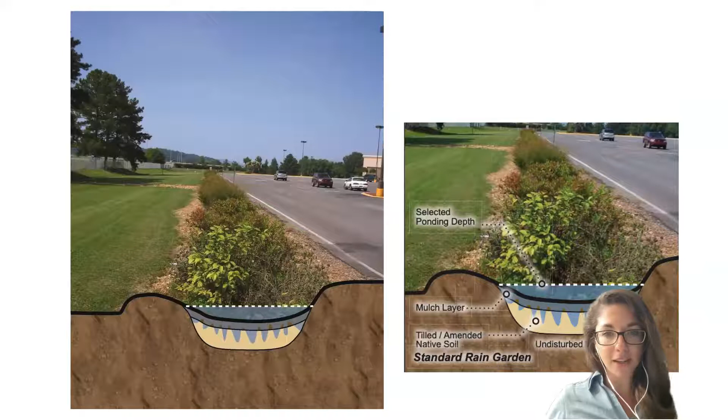This is just an example of your typical rain garden. It consists of a low depression in the landscape with native plants, mulch, and potentially amended soils—not too complicated, and definitely something you can do.

We'll go over this again, but as a reminder, rain gardens are designed to filter and help capture stormwater runoff. They're designed to hold some of that stormwater in a ponding area before it runs off to wherever it's going, whether that be the local storm drain or somewhere else. We will talk today about how to figure that out.

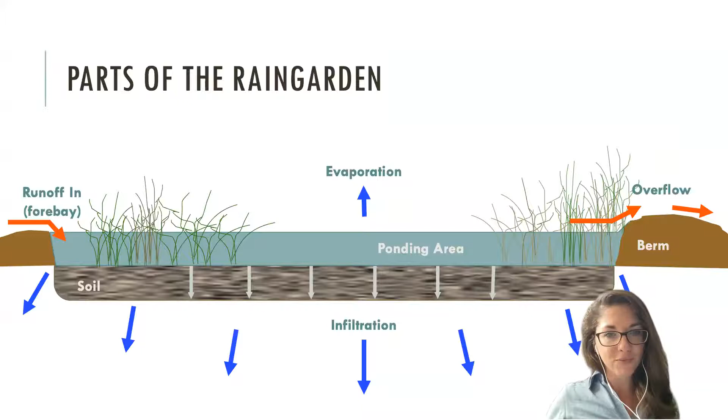We'll be going over quite a lot. Okay, let's see.

We went over this a little bit yesterday, but the benefits of establishing a rain garden: not only are you helping make a difference in improving stormwater and cleaning your local streams, but this is also something that you can do fairly low cost, with the added benefit of using native plants to increase habitat.

It doesn't have to be too costly, and there are ways you can make this a really attractive landscape feature for your yard.

So this is kind of where we left off yesterday. We'd already gone through the site analysis and at this point selected where we want to install our rain garden. We've already called 811 and made sure there are no utilities, and we've addressed all our constraints, so we have a location that we think is going to be workable.

I know these first couple slides are review, but we talked about paying attention to the topography of the landscape—where does that rainwater move when it falls onto those impervious surfaces? I showed you this site yesterday where we were going to install a rain garden, and I outlined this portion of the rooftop that we knew was going to be collecting stormwater and directing it to our potential rain garden site.

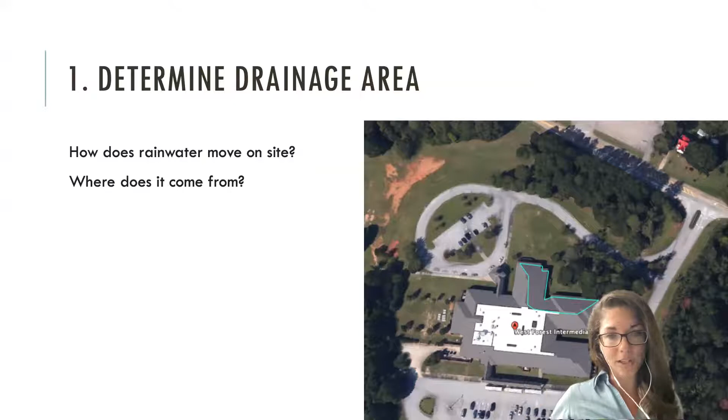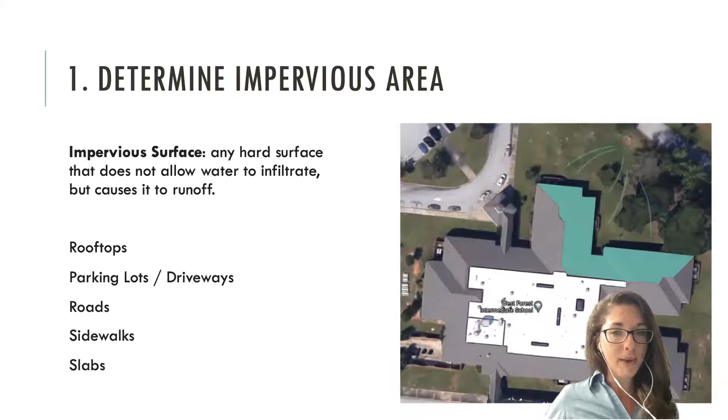We talked about impervious surfaces, including rooftops, driveways, sidewalks—anywhere that stormwater is going to flow and not be able to infiltrate into the ground. Anywhere that stormwater is falling from and may be redirected to your rain garden site is what we want to start calculating and keep in mind, because the size of our rain garden is going to depend upon the amount of impervious surface from which we're collecting that stormwater.

Again, it's review, but if you're trying to estimate the square footage, the area of those impervious surfaces, Google Earth is a really easy way to do that. You can find your site pretty easily online, then physically draw out the outline of the shape that's going to be redirecting stormwater to your site, and it will automatically calculate the square footage for you. Really helpful, especially for a large building.

But you can also pace it out on the ground—estimate your own foot pace and take steps along the side of the building to count it out that way. And again, always go visit your site. I highly suggest you do that, even though you can use these online tools to help map it out.

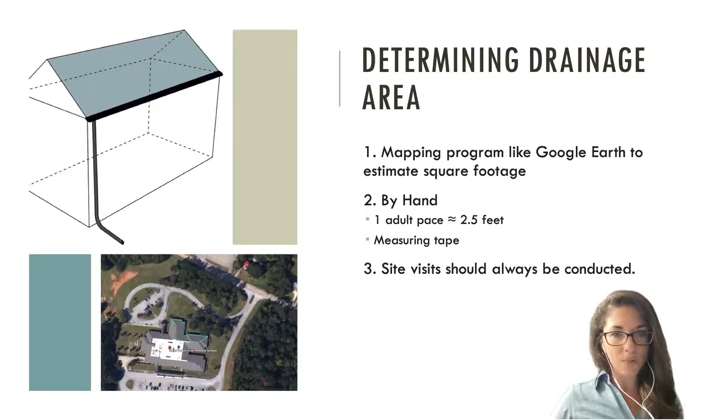This is going to be in the resources we give you at the end of the workshop, but it's helpful to tally all those square footage areas up so you have an idea of your total impervious drainage area. That's what we need to help calculate the size and depth of our rain garden.

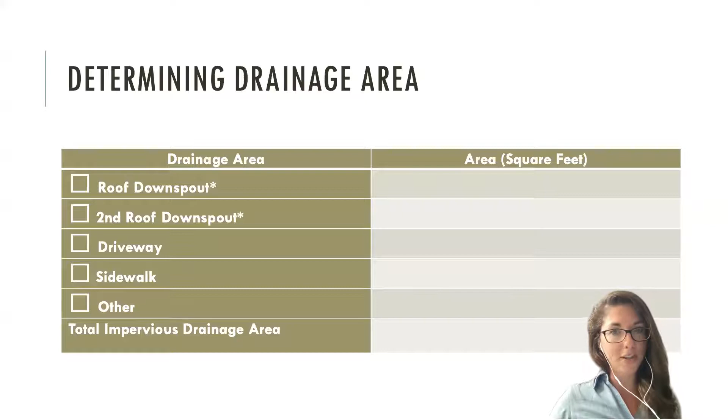I think all of that is pretty clear—I know that was a bit of a review, but hopefully everybody's on board now with the difference between a rain garden and your standard aesthetic garden, and why we're interested in calculating the size of a rain garden in relation to how much stormwater runoff we're going to be getting. Today we'll also talk about plant selection and how important that is in treating that stormwater runoff.

All right, so we talked about this yesterday, but here's just a refresher. Sometimes it helps to see this in a different way. So components of a rain garden that we're going to be talking about today.

So there's that slope, kind of where that water, the stormwater is coming in from. It pitches a little downward. You don't want to add a really steep grade. We suggest like a 3 to 1 grade to prevent erosion, especially if you're having a lot of stormwater runoff coming into your rain garden.

There's also the inlet. That's where that stormwater is going to be entering the garden itself. And you could have one or you can have multiple. We'll talk about it more and I'll show you some examples of what that looks like.

There's also a little buffer edge, before you reach all your native plants. And sometimes that might just be a grassy area, or a little bit of - some people even use rocks. So we'll talk about that too.

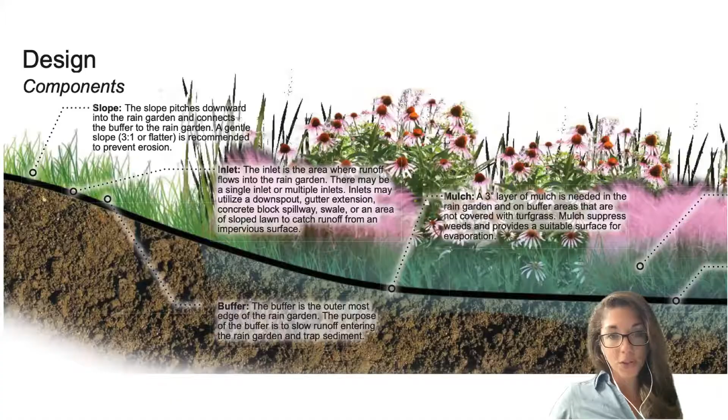And then we talked about ponding. That's that kind of stormwater storage area where we want our stormwater to sit for a little while, infiltrate back into the ground, and just kind of replicate that natural hydrology that we talked about yesterday.

And then the base of the rain garden, that's how we'll be estimating how deep we need to go and what that ponding depth should be. Generally, that's going to be a flatter area that allows our first flush of stormwater to filter into the earth.

And then we have our berm, which is a higher area towards the outfall of the rain garden. So we have our stormwater coming in, and on the opposite side, we'd have our berm that kind of helps keep that water in place and helps it pond. We'll talk about that as well.

And then lastly, you have your overflow. That's a little divot in the berm that allows that stormwater to flow out into the landscape, basically allowing it to overflow in a safe, directed way.

Okay, so selecting ponding depth - that, as we talked about, is the depth at which water will pond before going through that outflow. We talked about how you can do a soil infiltration test, and you should definitely do that to make sure that your soils are going to be draining well.

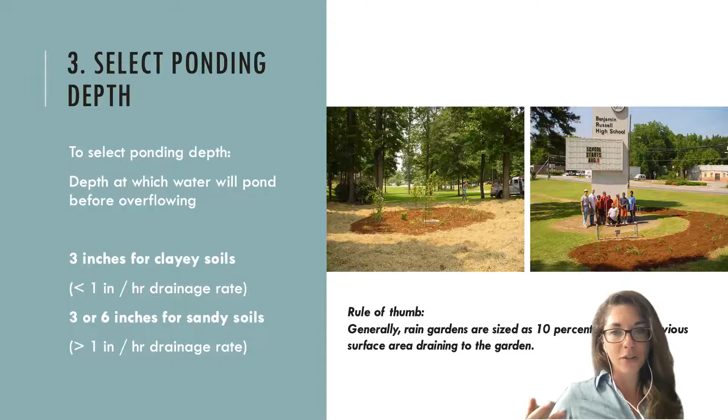A simple rule of thumb is that rain gardens are often sized to be about 10% - I know my head's in the way here - of the impervious surface area draining to that rain garden. That's just a helpful rule of thumb to have in the back of your head. Because when we're doing these rain garden calculations, it can seem a little intimidating at first, but really they don't have to be exactly precise. I think as long as you're kind of in the ballpark and reaching that general range, that's okay.

So another helpful rule of thumb based off of that idea, that 10% we're trying to aim for of that impervious surface area for our rain garden size, is this 10-20 method. And this is pretty helpful and simple. So for a 3-inch ponding depth, we take our rain garden size, and we know that that equals basically our impervious surface area, our square footage that we determined, divided by 10.

If we want to do a 6-inch ponding depth, we just divide that impervious area by 20. Here's an example, and we'll walk through multiple examples with you so that you will totally have it by the end of this workshop. If we knew that the building we were capturing impervious surface from was maybe 30 feet by 12 feet, we multiply that to get the area.

If we know our soils are not draining at a really high rate, we might want to select a 3-inch ponding depth. To do that, we just divide the surface area by 10, and we can estimate we'd have about a 36 square foot rain garden. The 10-20 method is really just a helpful rule of thumb to estimate your rain garden size based on infiltration and the area you're trying to treat.

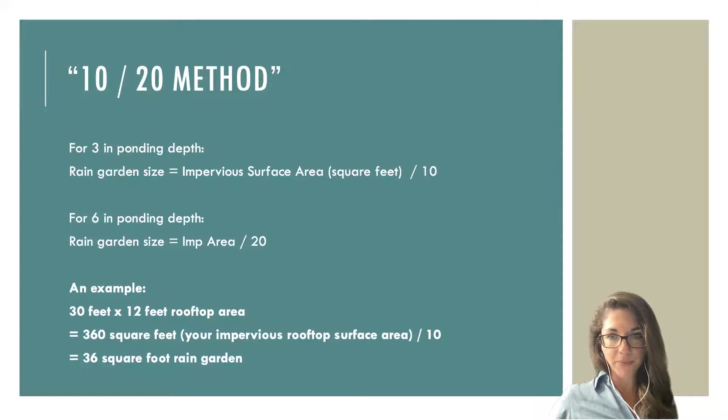I saw someone had a question about how critical the size is in a home garden - is it okay for it to be larger or smaller? Yes, I think this is kind of what Rachel asked yesterday.

We're trying to estimate these sizes to treat that first flush based on the amount of stormwater we expect to get to our rain garden, but we have constraints - we can't always do that. So you can have it be larger or smaller, and if you've designed it well to have that overflow, that should be okay. It'll just mean you won't be able to treat necessarily all of that square footage you'd like to, but you can still capture a good deal of it. We can talk more in depth about that later on too, Beth, if you want.

When we talk about ponding depth, we're also thinking about excavation depth. When we go to install our rain garden, how deep does it need to be to get that ponding depth? This is a little tricky - if we're aiming for a 3-inch ponding depth, we actually need to dig down more than 3 inches, especially if we're adding a mulch layer or amending some of our topsoil.

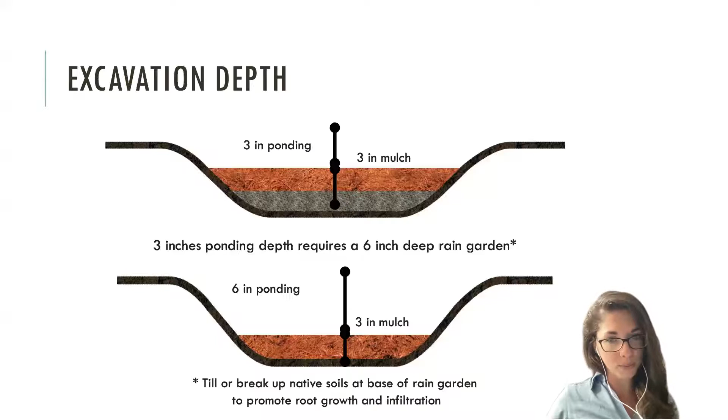Typically we suggest at least 3 inches of mulch on top, and you might want to dig down even a bit more to amend soils or put topsoil back in. So ultimately, if you want a 6-inch ponding depth, you might have to dig down 9 inches and then add back that mulch to make up those 3 inches. At the end, the depth between the bottom of your rain garden and the top overflow area should measure out to your desired ponding depth - just something to keep in mind for installation.

Going back to our earlier example of the building I was telling you about where we were going to install a rain garden - I used Google Earth to calculate their square footage, and we were going to be capturing a decent amount of square footage. We had done an infiltration test and knew the soils were pretty good in terms of drainage, so we decided we could opt for a 6-inch ponding depth.

To get that ratio, we took the square footage in area and divided it by 20, estimating our ideal rain garden size might be about 394 square feet. So then how do we determine the actual length by width we want our rain garden to be? One easy way is to just take the square root - when we did that, we got an estimate of about 20 by 20. But you don't have to stick with only those dimensions; you can rework them to fit the constraints that you have.

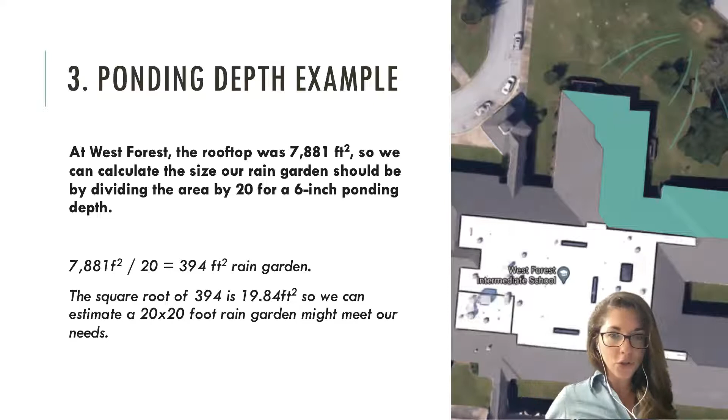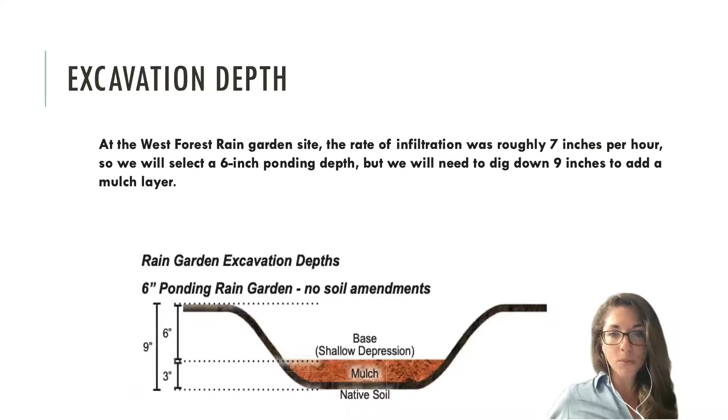So, you know, I told you we had pretty good drainage. We were getting about 7 inches per hour. So we did select that 6-inch ponding depth, and we were planning on digging down at least 9 inches, or maybe even 10 if we had some topsoil to put back in, plus adding that extra little layer of mulch. But ultimately, we would end up with a 6-inch ponding depth.

Okay, this is a bit of a review of some stuff we've already said. Keep in mind that when you're excavating to that ponding depth, you also need to be factoring in mulch and soil amendments. We want to be aiming for, like in that example, a kind of flat bottom to your rain garden, but a slight center depression is okay. We don't want to have all the water only in one very low spot; we want it distributed.

So as we're excavating, we also want to keep in mind that we should stockpile some of that soil and grass that we're removing from the site. We're going to save that aside for a berm, and hopefully reapply some of the topsoil we've removed—that's like the first 4 inches or so. That's typically really good, rich soil that we might want to put back into our rain gardens, because it's often some of the best soil, but it depends on your site.

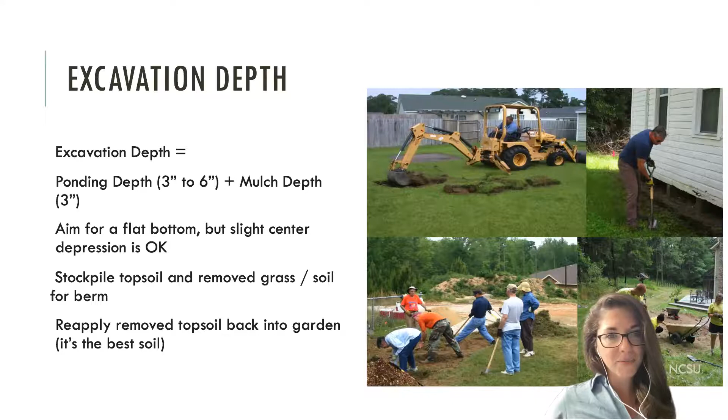Okay, so we talked about amended soils. Again, you can do a soil test, especially after you've done your rain garden, to make sure the soils are appropriate for plants. You could also do a soil test to see what the composition of your soils is. If you don't have time to do that, there's also the option to add in other types of amendment, like compost.

If your soils are not draining well, some people add in sand, but I'll make a slight caveat: do not use sandbox sand. You want to use coarse sand for any sand amendment, because there is a difference—round sand can actually clump and not help soils drain as well, but coarse sand will help with drainage. It really depends on the composition of your soil, but you can have a mixture of sand, that rich topsoil, and compost, if you're putting some back in to help new plants get established.

More details are going to be in the resources we give you at the end of this workshop, so if you want to dig into that more in depth, there will be more details there as well. Okay, so let's get into an example together—we'll do one together, and then we'll break out into groups and do our own example as well.

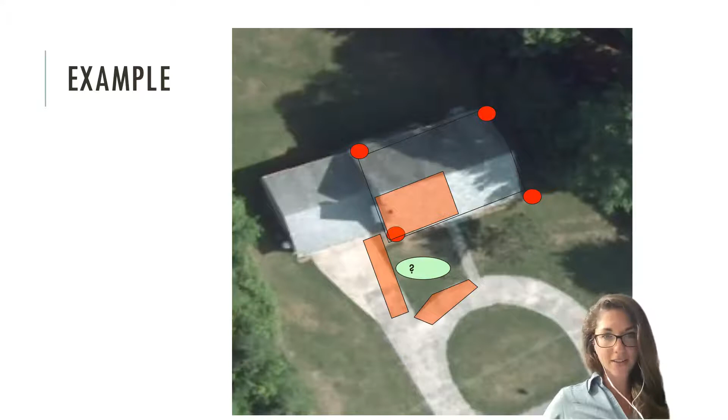Okay, so this is an aerial view of a house, and we're thinking about installing a rain garden here. The little red dots symbolize our downspouts. We did our site analysis and identified where those downspouts were. The areas that are highlighted are the impervious surfaces that we know are going to be draining to our potential rain garden site, outlined there in green.

For our hypothetical situation, we've estimated we have about a 50 by 50 foot rooftop total—that square area outlined. We also know we have about 400 square feet of driveway that will drain to the rain garden. We've done our infiltration test, and we know we have pretty good drainage—over 1 inch per hour. We're going to walk through how to determine what size the rain garden should be.

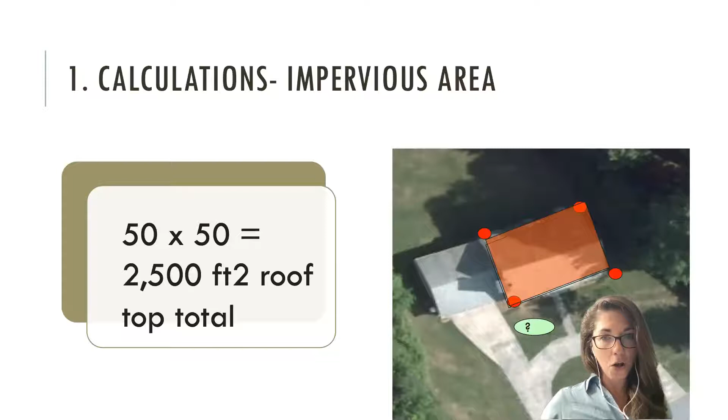First, we want to calculate all of those impervious surfaces we talked about, starting with the roof. If we have a 50 by 50 foot roof, we multiply that to get the square footage, and 2,500 square feet is our estimated rooftop total. But that's the whole roof—so what do we do if not all of the roof drains to our particular site?

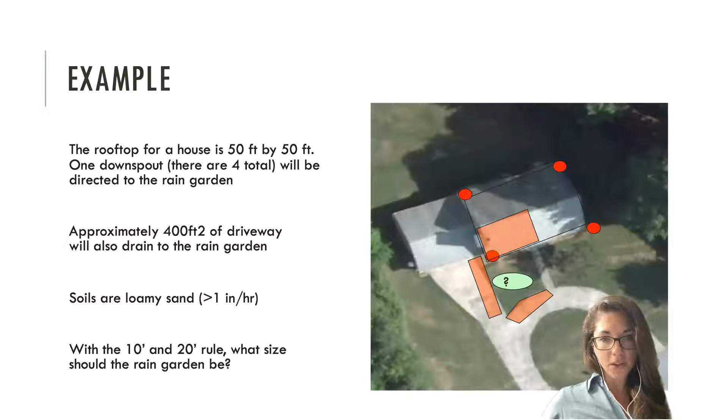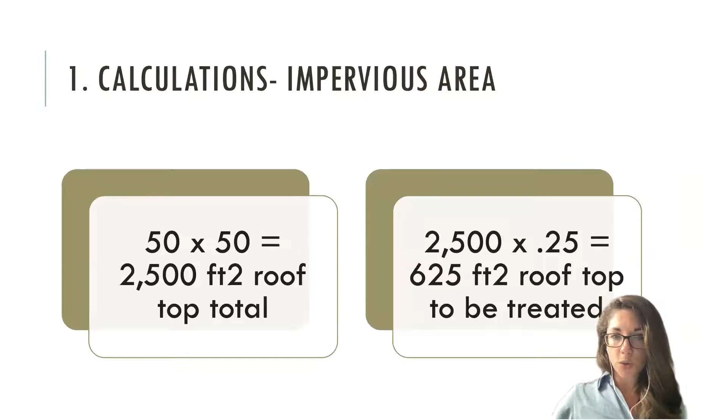There's an easy way to handle that: you can estimate what percentage of that rooftop is going to drain to the site. Going back to this image, we know this is about the area of the rooftop that's going to be draining, and that looks like about a quarter. So we multiply our square footage by whatever percent of the rooftop we think is draining to the site—in our case, about a quarter—which gives us 625 square feet of rooftop to be treated in our rain garden.

Okay, everybody with me there so far? Okay, so we got that.

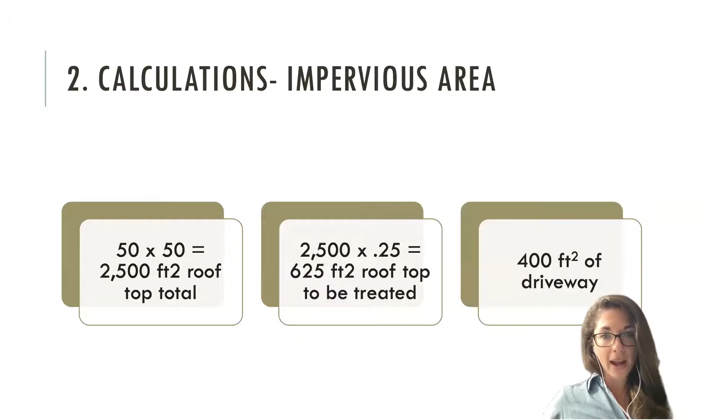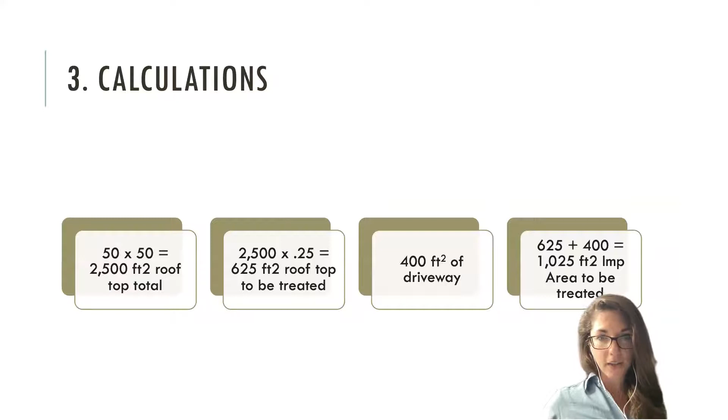We also know that we have the driveway that's also going to be flowing into our rain garden, right? So we want to make sure that we add that in. We've outlined that area that's going to be draining, and we know we need to add them all together. So we combine that, and we end up with over 1,000 square feet that our rain garden should be designed to treat.

Okay, so we've come up with that. We kind of know what our impervious surface square footage and area should be. What about our ponding depth?

We know that we have pretty good drainage, so we could opt for a 3-inch ponding depth. Sometimes this depends upon the size and your site constraints. If you needed to make that rain garden smaller, you could opt for a 6-inch ponding depth and hopefully still treat as much.

So if you were going to opt for 3 inches, we'd use our 10-20 rule. You could divide that by 10 to get that 3-inch ponding depth, and we'd come up with about a 100 square foot sized rain garden.

If we decide to opt for that 6-inch ponding depth, we're going to divide it by 20, and you can see it's going to be smaller, but deeper. So that could potentially help with our site size constraints if we needed it. That would be about 50 square feet.

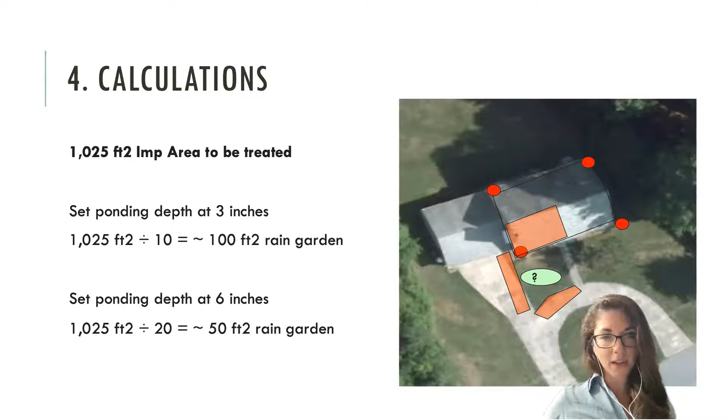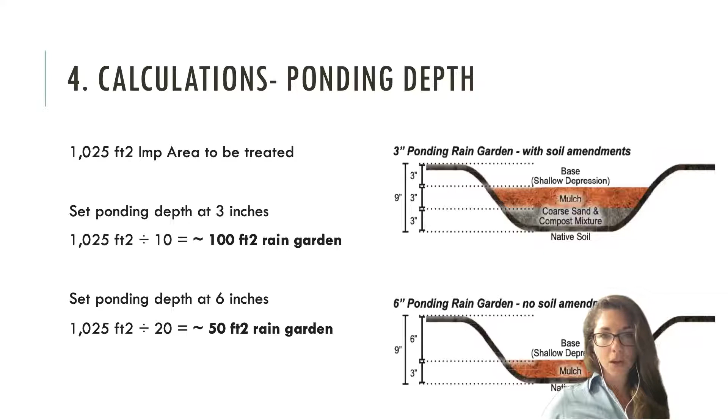Okay, and again, when we go to install our rain garden, we want to be thinking about how deep we'd actually need to be digging down, especially depending upon if we need to add in some compost or some coarse sand. We need to be factoring that into our excavation depth.

All right, so we are going to try this and see how it goes, but I'm going to challenge you guys. I'm going to put you all into breakout rooms. We've got almost 30 people here, so I'm going to break you up into small groups of about 5, and I'm going to give you a worksheet.

Caitlin, maybe you can help me get that link up. We're going to give you a worksheet you can download, and essentially it's just going to walk you through the same steps we just went through, except with some different dimensions. We'll give you about 5 to 10 minutes to work together in a group and come up with some rain garden sizes. Then we'll come back and discuss what you guys found and how that went.

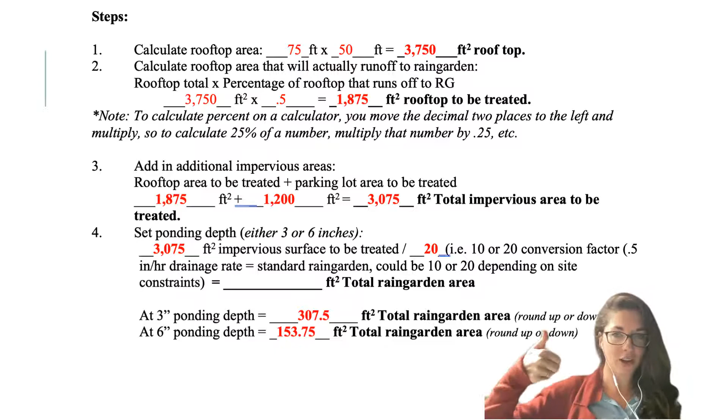Okay, so everybody on board? Looking good? Okay, good. So I think I'd mentioned earlier that rain gardens don't have to be exact, right? They don't have to be as precise.

So for the 3-inch ponding depth, we had 307. I rounded up, and some of you may have rounded down. So I ended up with this possible size of about 18 by 18. But again, we can rework those sizes depending on our site constraints. These would be some other potential sizes or dimensions that would probably treat about the same amount - 10 by 30, 15 by 20, all kind of aiming for that about 300 square feet.

And same thing with 6-inch. We went through the same process, and I came up with potentially about a 13 by 13 square foot rain garden. Did anyone get anything radically different than this?

Okay, I assume not. If not, we'll discuss in your Q&As and double check. But in the worksheets that you're going to get after the workshop, we'll include this. This might be a helpful way for you to walk through calculating your own site once you get to do your own site analysis. So we'll include the actual worksheet and the cheat sheet, just in case you want to double check.

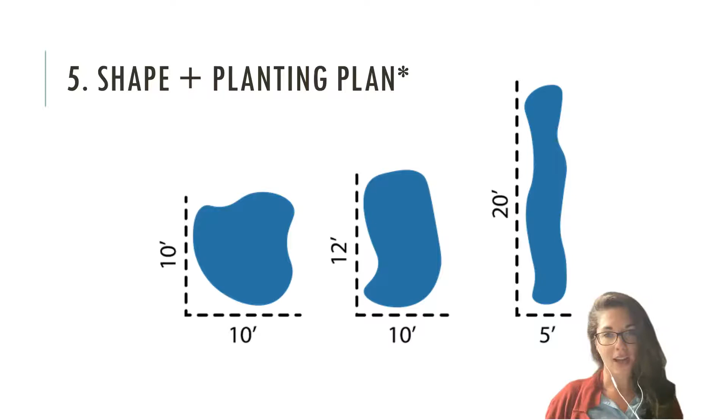You'll need something to break up the soil - shovels, backhoe, anything that's going to be helpful in loosening up those soils and helping you excavate. Some people use actual machinery, especially if they're doing a larger rain garden. That could be more difficult to come by. And again, you don't have to do that.

You can do it by hand. And it's a great way to get volunteers to come out and help you do some of this work as well, because doing it by yourself could be a challenge. But fortunately, there's always volunteer groups that you could reach out to and see if they'd be interested in learning with you. So wheelbarrows - definitely have some of those.

Stakes and string - we'll talk about why you might need that. Tarps can be helpful when you're removing that soil in the initial digging down to that ponding depth. It can be helpful to just have a tarp to put that on if you need to move it around, or you don't want to deal with trying to move it or shovel it up later.

Again, you don't have to have this with you necessarily, but you can think about soil testing to make sure that you have the right amendments needed for your rain garden. And then having a ruler or something to help you measure that ponding depth. And then thinking ahead, spray paint potentially if you are doing a large rain garden and you have a nice rain garden plan that you really want to stick to - that could be helpful when you're working with a lot of volunteers.

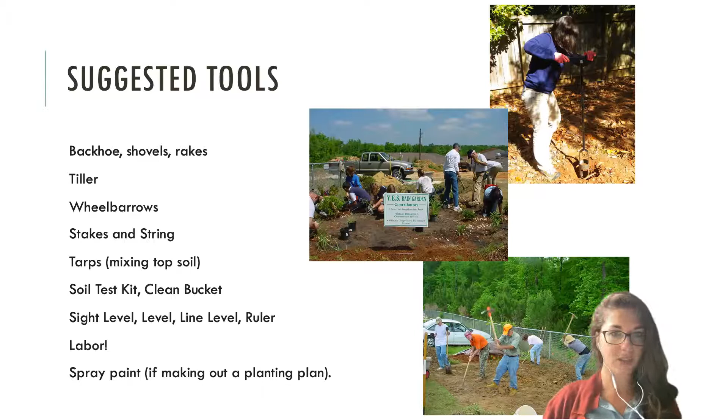So we talked about the ponding depth. What's a helpful way to do that? We know our rain gardens are probably going to be on a slightly sloped area of land, since they're going to help capture that stormwater runoff. But not too sloped, as we discussed yesterday.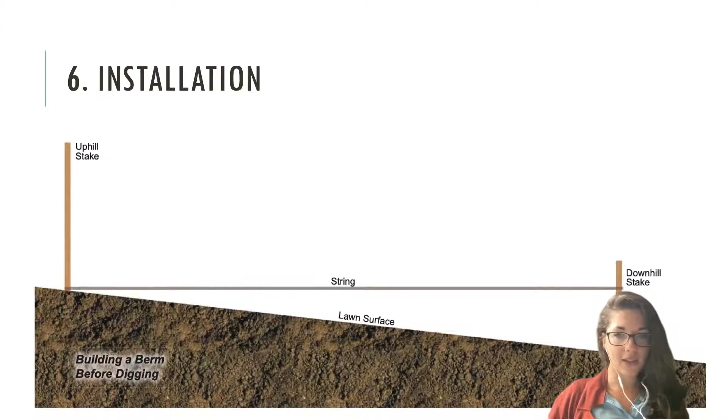This is why you might need those stakes. You can place an uphill stake and a downhill stake, then tie a piece of string across the two to be level. This gives you a reference point for knowing how far to dig down into your ponding depth. Get this set up to begin with, and it will help you know how deep to dig.

As you're digging out, let's say you want to dig down to 9 inches. If you want a 6-inch ponding depth, dig down 9 inches to at least have a mulch layer. Remember to keep that inflow not extremely steep, but maybe a 3-to-1 ratio. We want our rain garden base to be relatively flat, could be a little bowl, but relatively flat if possible.

We want to measure from the base to the top of the string, which is basically where our outflow is going to be. We'll measure that and make sure we've got about 9 inches, or depending upon your ponding depth, 6 inches, and do a variety of measurements to make sure you're relatively consistent across the board.

While we're doing that, we'll be thinking about building the berm too, so that soil you're excavating can be put on a tarp and used to build your berm, which helps keep that water in place. We will have a little outflow notch, but we do want a berm to help allow for that ponding to actually occur.

The berm should be mounded as high as the uphill grade of the rain garden, as you can see in that illustration. We'll make sure this is accessible to you too, so you can revisit it. Sometimes it's just helpful to see that kind of diagram when you are in the process of doing this.

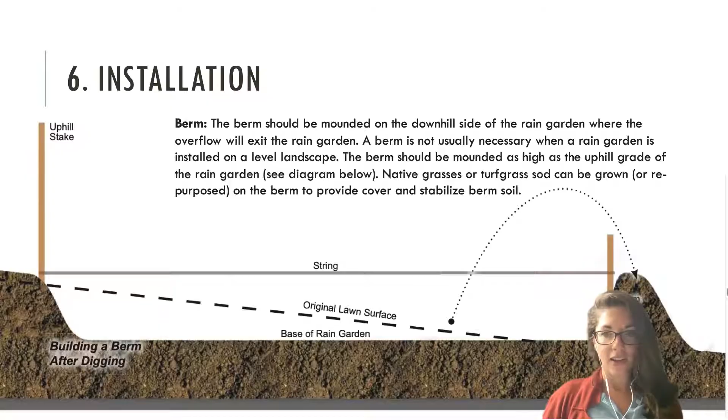So installation. We talked about the inlet, which is where the stormwater is going to be flowing into your rain garden. Sometimes that can be pretty high flow depending upon where your rain garden is located.

Often erosion can be a bit of an issue right at that inlet area. So one way to deal with that is to use a little bit of gravel or rocks, or even a concrete splash if it's coming down from a downspout, to help slow down some of that stormwater as it's entering the rain garden. That can be really helpful, especially when you're trying to get your plants established in the beginning.

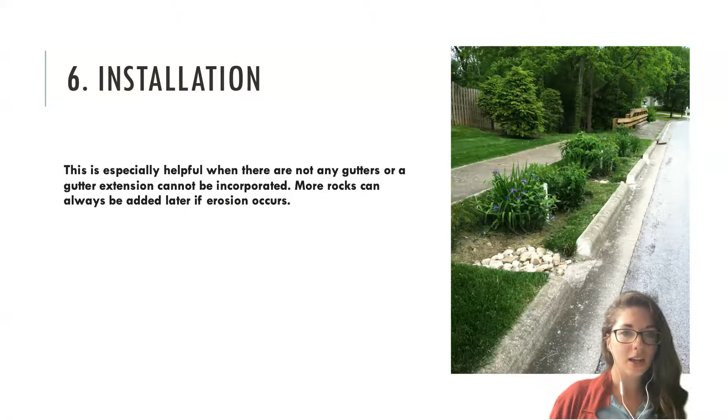Okay, so we talked about overflow - that's the low spot or notch created in the berm to serve as that overflow. We may not be able to capture all of that stormwater runoff, so we want to make sure there is space for that water to flow out, even if we are ponding some of it and infiltrating it slowly. We still want to make sure there's a designed overflow, and you can stabilize that.

This can also be an area where you might have some erosion or problems occur, but you can stabilize that sometimes with landscape fabric if that's something you want to do. A little bit of stones, much like the inflow. And some people plant grass along that area as well to help prevent that erosion.

So you want to be thinking too about where that overflow is going to be directed. We talked about making sure that we don't make our neighbors mad by directing our overflow into their yard or anything like that. So just be cognizant and thinking about that there does need to be a directed outflow for your rain garden.

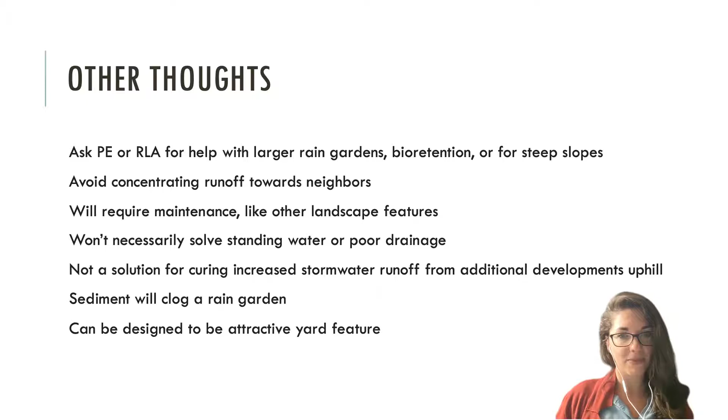So plants, I think this often is a little bit of an overlooked part, especially if you've done all that hard work of figuring out the ponding depth and the rain garden size. It can be a little difficult to persevere and do plants, but these are really critical parts of your rain garden, and can be also the key to making sure that your rain garden's aesthetically acceptable, depending upon what kind of neighborhood you live in. So taking the time to select your plants carefully and organize them so that they can be an attractive landscape feature, I think is pretty critical.

Something to note, when we're planting in our yard, we definitely don't want to be planting invasive plants. It's hard to know sometimes what is invasive and what isn't, especially since sometimes invasive plants are even sold in big box stores. But depending upon where you are, you can look that up.

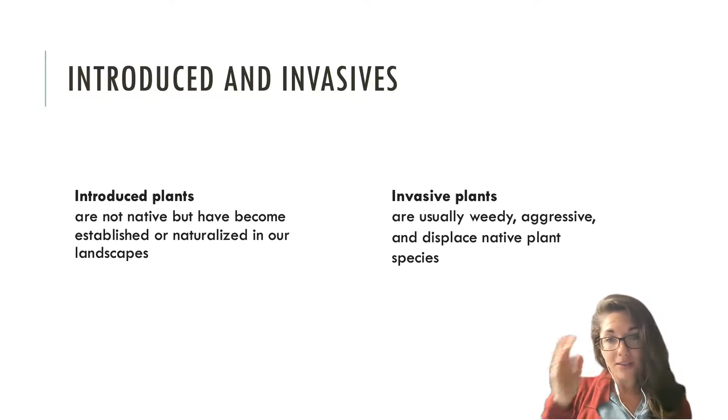There's an Alabama Invasive Plant Council, and they have a list of plants that are invasive. If you're in another state, I'm sure that you can find a similar list where you are. These are just some examples of common invasive plants that we may not think about.

Nandina, everybody loves that as a landscaping plant, but it's actually invasive. Chinese tallow tree, another one we tend to see. Pampas grass even is becoming invasive down here in the southeast. And of course, kudzu. So just be cognizant. English ivy is another one that we often don't think about as being really problematic, and that's sold frequently. So we don't want to be doing any ecological damage while we're also planting our rain gardens.

So native plants are naturally occurring. They're plants that are adapted to live in this environment. And they promote native wildlife because wildlife has also evolved to rely on these native plants. So making sure that we bring those back into our ecosystems is really important.

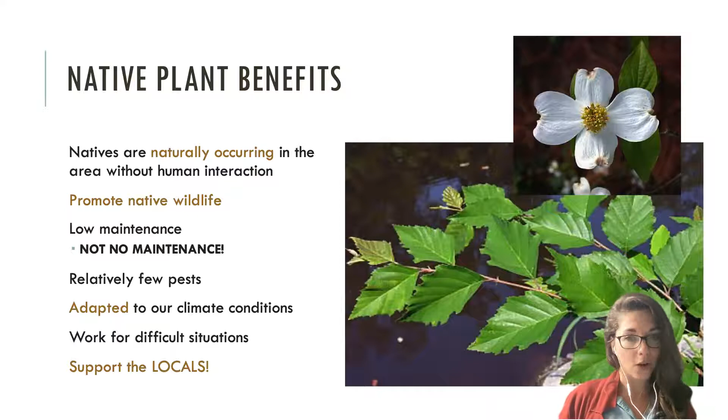So I'm going to just talk through a couple of these different planting options and different plants that you can use. Again, just keep in mind that when we plant native plants, we're also helping bring in pollinators, and you could have your rain garden double as a pollinator garden.

I already kind of mentioned this a little bit, but they are a really critical part. And the plants we pick need to be both flood and drought tolerant, which if the plants are adapted to your area, they probably will be, but we'll talk about how to select for those different needs, the different plant needs that are in those different stages of your rain garden.

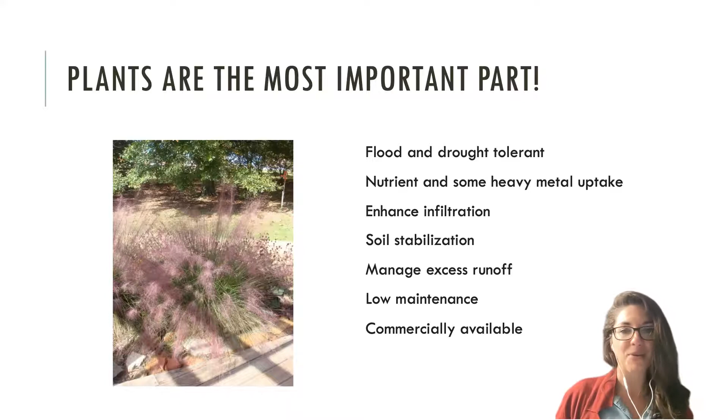They're really important there for that soil stabilization. And like we said, they're low maintenance, and you can often buy them through nurseries. We're going to give you a list of nurseries that, at least here in Alabama, may not have been updated recently, but where you could potentially get some native plants, or at least look around for native plants.

So even though we're opting for native plants, keep in mind that they still take a couple of years to get developed. Sometimes in the very beginning, when you're planting your rain garden might look more like this. It doesn't look as full because those plants are going to take a couple of years. So this is really a long-term vision that you have to have. And it's not just plug and play and you're done.

It does take time. So this is an example of these plants that were established this first year, second year growth, getting a little bit bigger. And you can see how we've had to think about how big they're going to get to make sure that we give them enough space to grow to their appropriate size. And then 2 years later, it's starting to look a lot more established, a lot more aesthetic. We're kind of getting that aesthetic that we want.

Okay, so let's cover some of these plants. There's a wide variety for you to choose from. And again, it's going to depend upon where you are. But when we are thinking about how to plant our rain garden, we want to be thinking about a couple different things. So we don't want to just plant it all the same type, because not only would that be aesthetically boring, but it's also not as great for habitat.

And we want to make sure that we build in a little resilience just in case some of those plants are not going to survive as well. So use different types of plants, trees. I don't often suggest using trees, especially since that root system can kind of take over your rain garden, but you can think about how trees would integrate into your rain garden or your whole site in general.

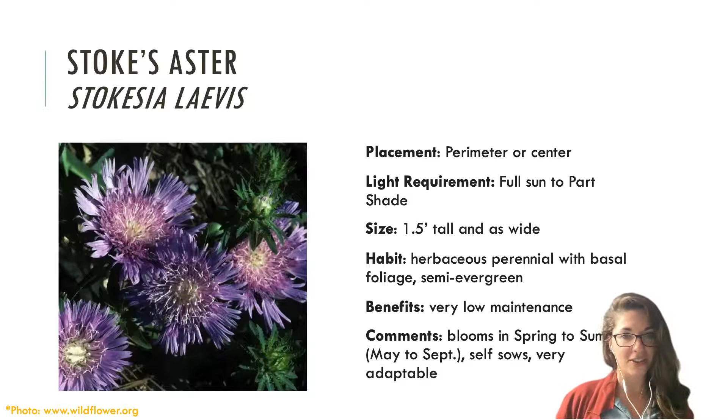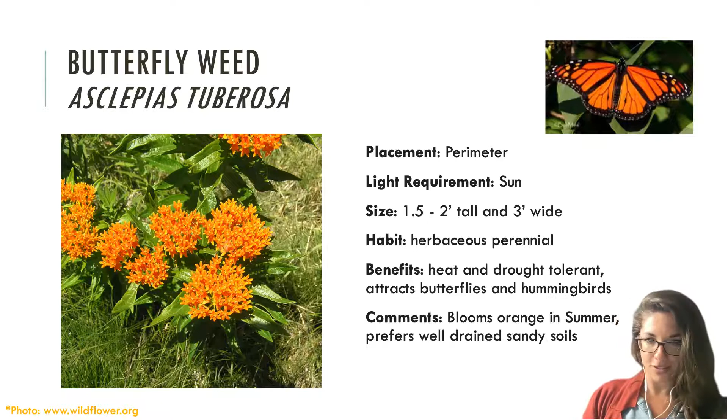It does pretty well with drought, and of course you get those butterflies and hummingbirds. So that's another great one.

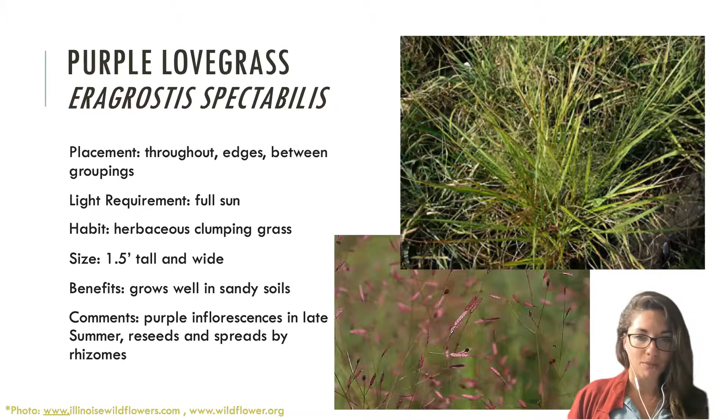We also want to think about grasses—it's nice to have a variety of both flowers and native grass. Purple lovegrass is one we like; it can help fill in a rain garden and works well on the perimeters between groupings of plants. It likes full sun, grows about 1.5 feet tall and wide, and does well in sandy soils, with pretty little purple frills at the top. It spreads underground via rhizomes, so you want to make sure it doesn't get out of hand.

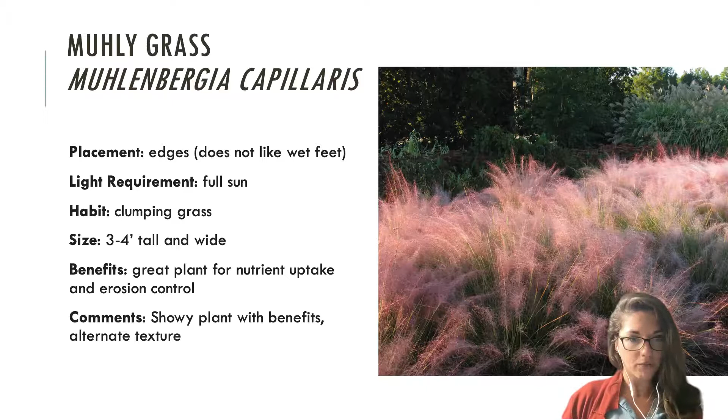Do the grasses do anything for pollinators? I think it depends—I'm not sure if any of them flower, though muhly grass might. It probably depends on the type of grass, but they do have a lot of benefits in terms of erosion control, and they tend to have really good root systems, so that's another benefit.

Okay, plant selection. Again, I'm trying to get through this so we have time for some Q&A at the end before 3:30. So I mentioned this earlier.

We want to think about planting height—we don't want to just go in and willy-nilly throw our plants about in the rain garden. When looking these plants up, think about their different height levels and whether they can handle standing water or not. It's helpful to sometimes draw it out for yourself and make sure you have a variety of different heights in your rain garden.

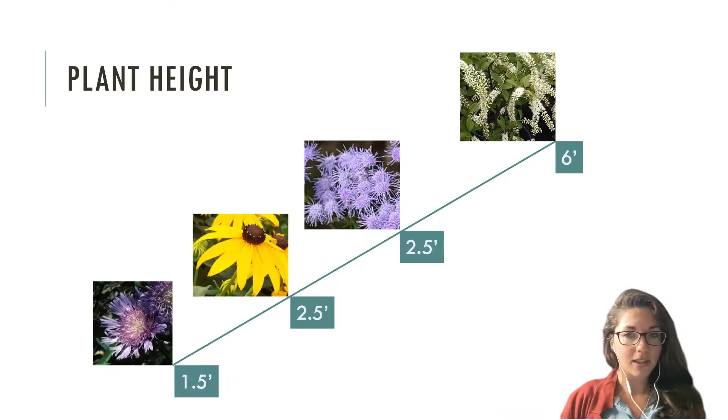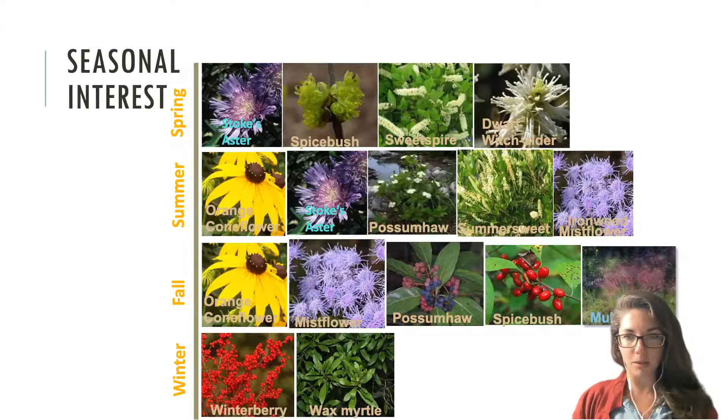Flower color is another thing. I like to have a variety built in, but again, I suggest you think about clumping those plants or clumping those colors together so that it looks more intentional.

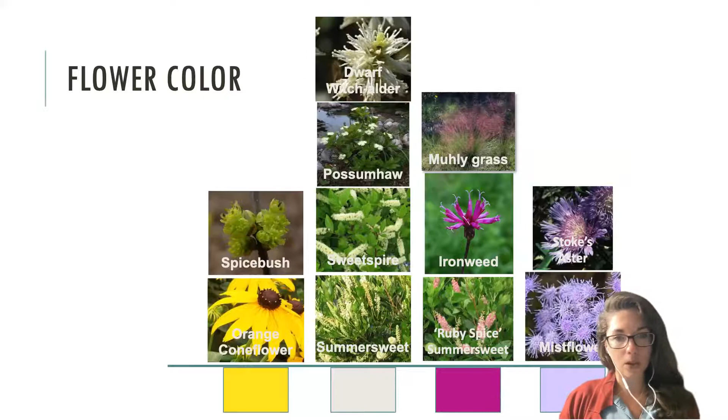One of the things that we struggle with here when we're trying to install low impact development projects, whether it's bioretention or rain gardens, is that there's often pushback against the messy aesthetic that people often associate with anything natural. And in urban areas, that can be a little bit of a tough sell. So if we do a good job with thinking about how we can make it look intentional, that can really go a long way in getting people on board with the rain garden design.

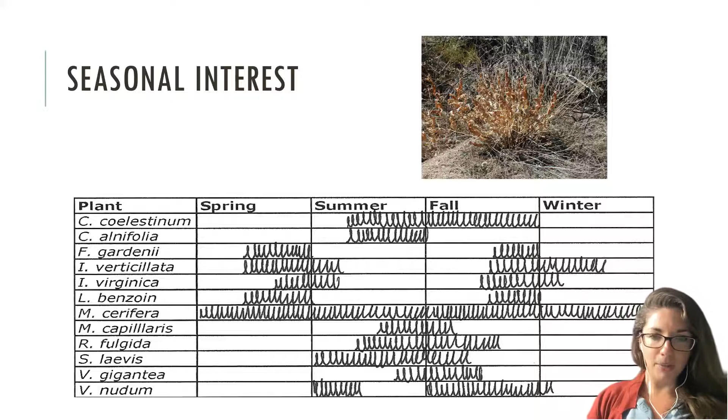So we have a couple examples of this in the resources we're going to share, but this is a helpful way to do it when you're planning it out for yourself. You can have your plant's name there on the left, and then just kind of scribble in generally when you think it will bloom or be providing some color. And that'll just make sure that something is going to be visually attractive.

Oh, Christine, thank you for saying that. Winterberry can be poisonous to household pets. I was not aware of that. Something to keep in mind for residential gardens. Okay, good to know.

Yes, and Beth, if you make your scribble on the color of the flowers, I agree, that would definitely help.

Okay, plant spacing. We want to think about the size of the plant when they get to maturity, so keep that in mind too. Read that plant label for spacing in advance. A rule of thumb is you want to give about 1 to 2 feet spacing for perennials, 2 to 3 feet for grasses, maybe 3 to 5 feet for shrubs, and 6 to 8 feet for those large shrubs.

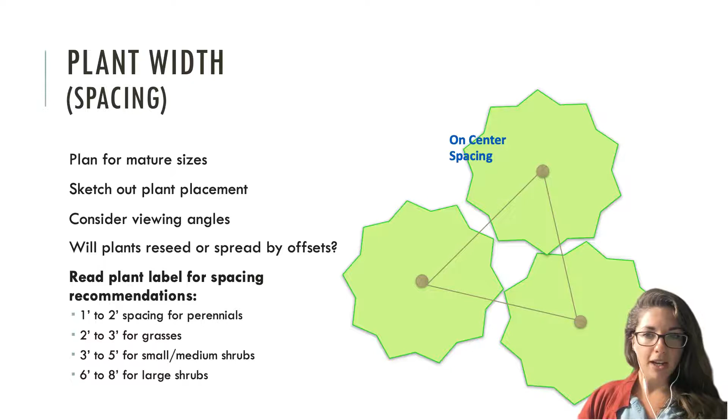But again, depending upon what you order or what you want your design to be, you can also draw it out, map it out, and just be prepared.

This is an example of a standard rain garden design, and this will be in your resources too. Here on the left, you can see how they have organized it based on color and the number of plants, the color I think that they expect those plants to provide and how many of them should be planted there. And that's a really simple way to do that. Then there on the top, you can see how we've drawn it out, so you have a better idea of where those plants will actually be spaced and what it's going to look like a little more.

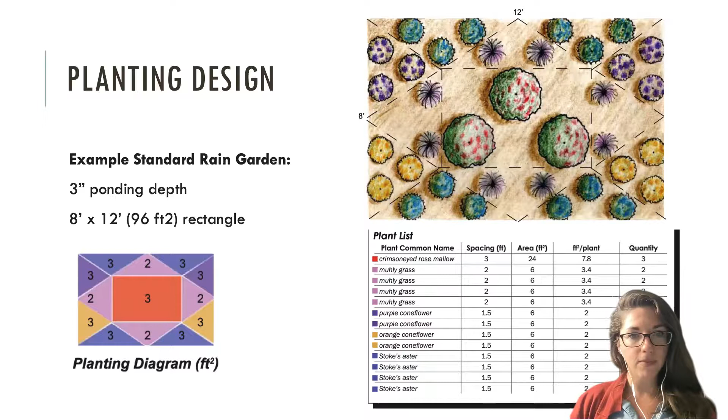So there's lots of different ways you can do this. Personally, I like an asymmetrical design, so it looks a little more natural. This is an example that we'll also provide. It's in our Low Impact Development for the State of Alabama book, and I'll give you a link for that so you can actually see these a little more in depth.

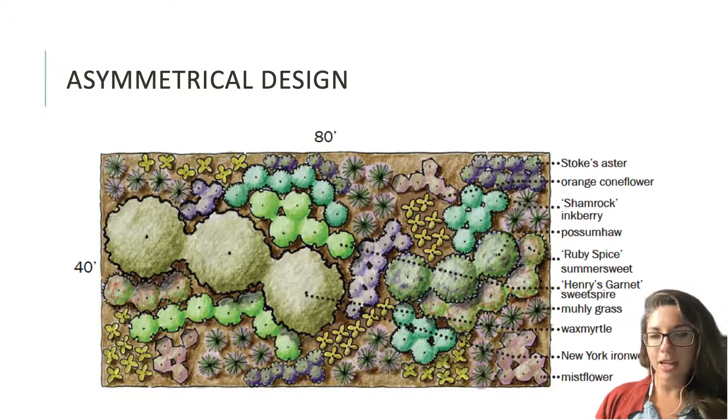So you can tell here how they've made use of that clumping technique. We have kind of, even though it's asymmetrical, it still looks intentional because they're putting those plants together so you have pops of different color at different heights. It can come across as looking not overly planned, but intentional.

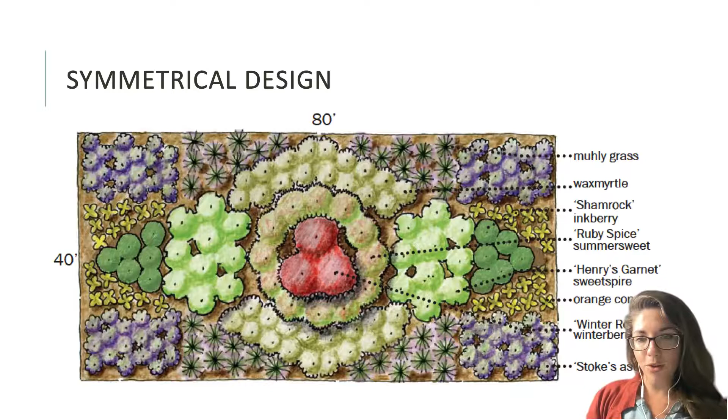You can also do symmetrical designs if you're into the symmetry. Same sort of thing - this is designed to be seen at different heights, so those lower plants are on the outside, moving towards height at the center and then back down. You can draw this out yourself, I think that's always been a helpful way to do it.

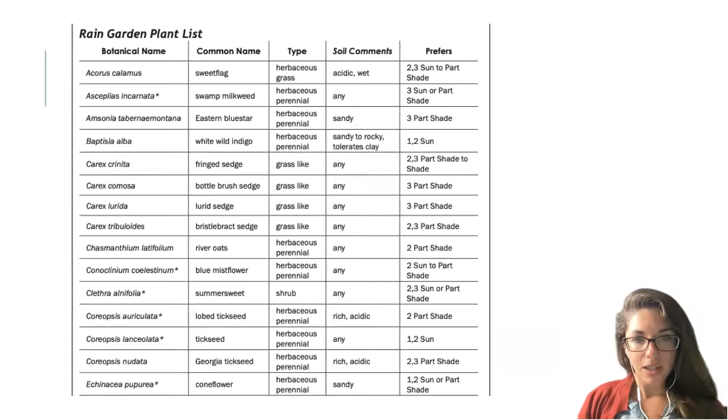We'll also give you this rain garden list, even though it doesn't have pictures associated with it. It can be helpful, especially for those of you who are worried about shade. This gives you an outline of which plants need what, and you can do a little more research and look up what they look like. That's also in our low impact development handbook.

All right, maintenance - the fun part that everybody's worried about. Maintenance is something that's part of caring for a rain garden, but with those native plants, hopefully it won't be too much.

One of the things we need to be worried about with maintenance, especially in the very beginning when you're doing your rain garden, is thinking about when we plant. Ideally, we don't want to be planting in the middle of summer because it's going to be really hard for those new plants to deal with all the heat and the drought. So it's best to plant in early spring or fall, again depending upon where you are. We have pretty mild falls down here.

So those roots can take a couple years to get established. We do want to make sure that we irrigate after planting, even though this is a rain garden and it'll catch some of that stormwater runoff. Take a little more care in the beginning and make sure that your plants are getting well rooted. It's good to plant in that dormant season - if you plant before the plant wakes up for spring, getting it in the ground then can be really wise so it's ready to grow and root when it becomes warm.